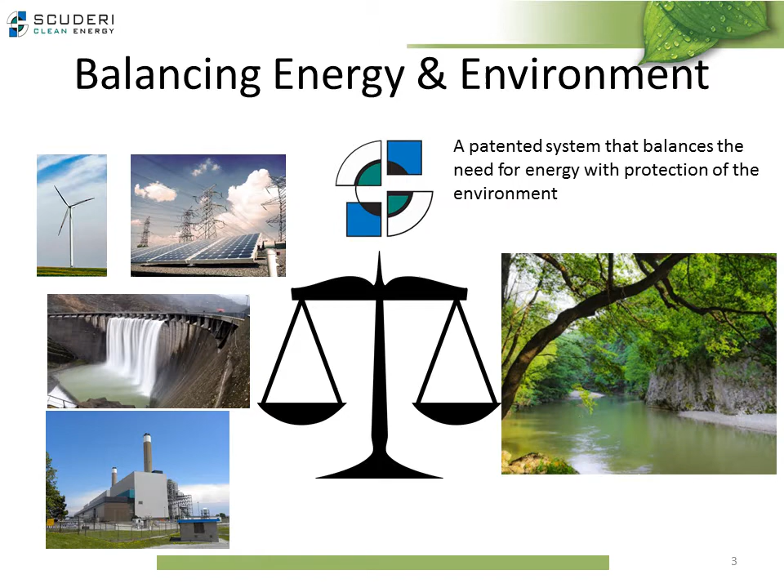Scuderi Clean Energy has developed several products for the distributed power generation market. The distributed generation market is made up of a variety of small, grid-connected devices that produce power on a more local level. These systems are referred to as distributed energy resources, and they make up the fastest growing segment of the power industry. Scuderi Clean Energy products are specifically designed for clean, efficient power generation and energy storage. In addition, our technology is protected with over 300 patents in over 40 countries.

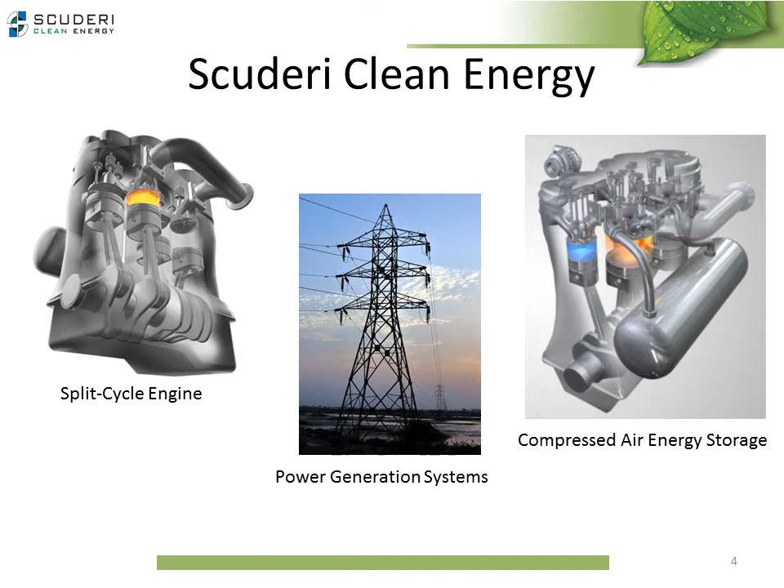For the power generation projects, Scuderi Clean Energy will utilize conventional engine technology that has many decades of proven performance from such companies as General Electric and Caterpillar. This effectively eliminates any technology risk for the main power generation component of the project.

In the power industry, there are two types of power systems that utilize natural gas to produce electricity. One is a combined heat and power unit that produces both electricity and heat to be sold to an end user. The other is an independent power producer that produces electricity to be sold into the grid. The interesting thing is that even though both technologies utilize natural gas as the primary fuel and utilize engines with generators to produce electricity, the two systems never seem to cross.

Combined heat and power systems are typically much smaller than independent power producers. They are designed around the heat requirements for a specific end user or customer, with the electricity as only a secondary benefit. The overall efficiency of CHP units is normally high because it uses a large percentage of the total energy produced, that is, both the heat and electricity. However, CHP systems are more focused on the use of the heat and are not typically designed to have high electrical efficiencies. High electrical efficiency is a key requirement for being able to profitably sell electricity to the grid.

IPPs, on the other hand, are typically much larger systems that are specifically designed for high electrical efficiency. This enables them to compete effectively when selling electricity into the grid. However, the IPPs never utilize the heat from the systems.

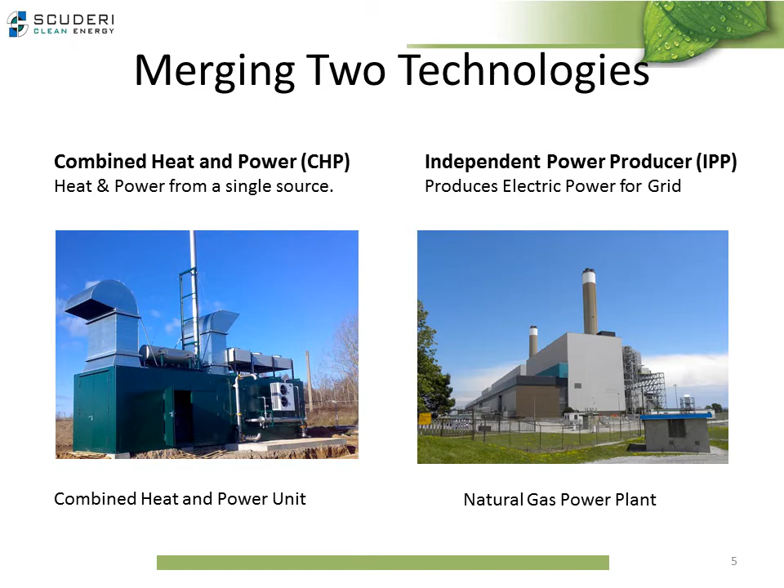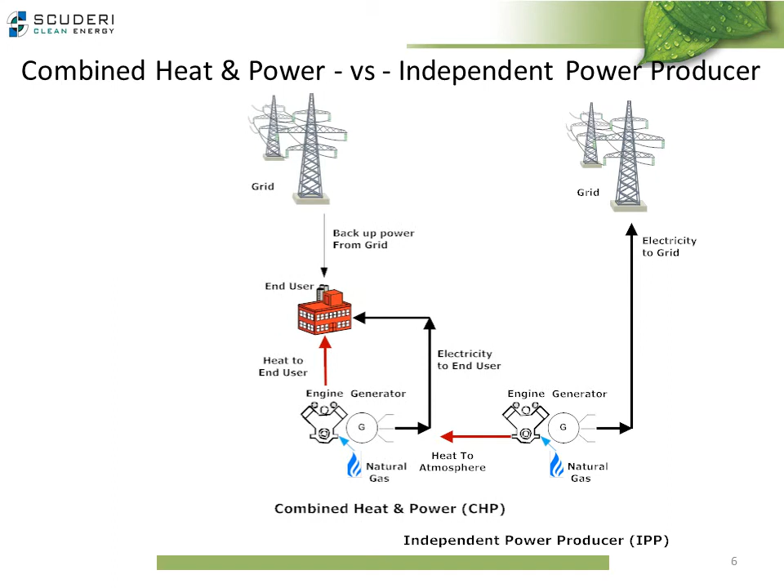Scuderi Clean Energy recognized a niche in the distributed power market located between the combined heat and power systems and the independent power producers. By merging these two technologies, the Scuderi system can function as both a combined heat and power unit and as an independent power producer. Scuderi systems are typically larger than most combined heat and power units and smaller than most independent power producers. In addition, Scuderi Clean Energy systems are designed for both high electrical efficiency and for utilizing the heat from the system.

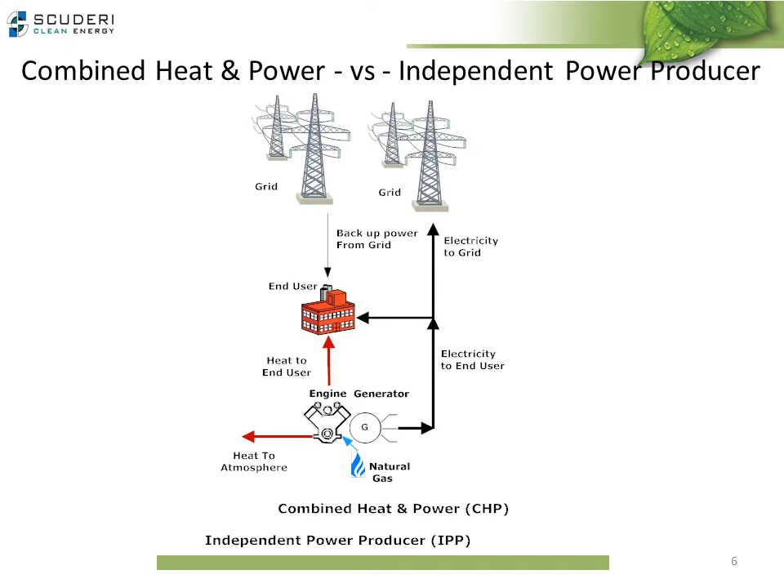By merging these two technologies, Scuderi Clean Energy has created a patented distributed power generation system that is a hybrid between a combined heat and power system and an independent power producer. This hybrid concept benefits from the advantages of both systems while eliminating some of their negative features.

One of the most significant advantages is being able to generate multiple revenue streams from both sides of the technology. For example, combined heat and power systems have 4 different revenue sources. First, electricity sales to the end user. Then the sale of heat or a commodity produced from the heat. Then alternative energy credits, which are state incentives for clean energy. And then accelerated depreciation, which is a federal incentive for clean energy.

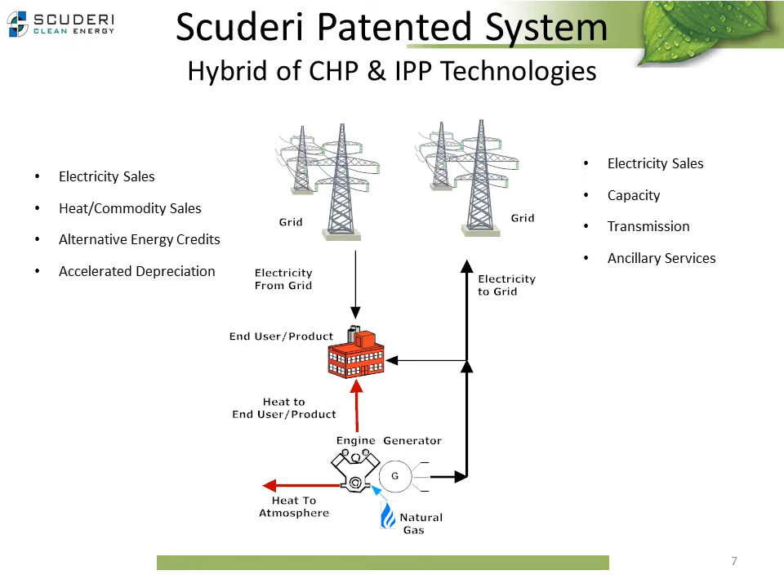The independent power producers also have 4 potential revenue sources. First, electricity sales to the grid. Then capacity payments, which also come from the grid. In addition, there's the opportunity for transmission payments, and finally, ancillary services. Achieving all of these revenue sources is only possible with the Scuderi Clean Energy patented design.

Utilizing the heat from the system is critical to its overall performance. By using the heat to produce a commodity or product, additional revenue is generated, and the units also qualify for both federal and state incentives, such as accelerated depreciation and energy credits.

There are numerous commodities that require heat in order to be produced, such as distilled and deionized water, urea, ammonia, ethanol, and many others. The advantage of commodities is that they can be sold on exchanges or in bulk, and the revenue from these commodities could be the biggest income stream of the entire project. For example, some of the markets for distilled water are cannabis growers, plating companies, printers, labs, and many others.

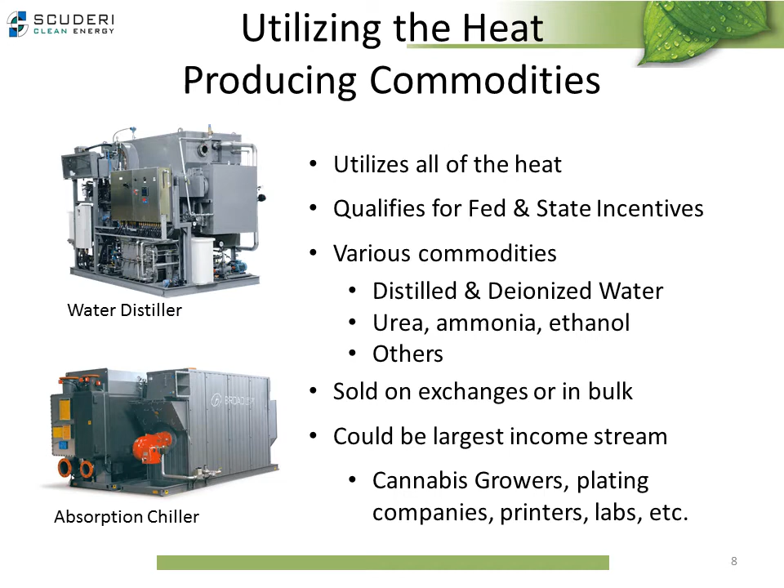The importance of multiple revenue streams is both intuitive and exciting. First, they act as a built-in hedge against market fluctuations. In addition, multiple revenue sources can have a significant impact on the bottom line of a project. For example, Scuderi projects typically have EBITDAs or net cash flows of over 50%.

This is very unusual in the power generation industry, which typically operates on very low margins. Also, multiple revenue streams help to ensure the financial stability of a project, and they help to reduce the dependency on any one revenue source. All of these benefits help make these projects very attractive to potential investors.

In addition to the multiple revenue sources, Scuderi Clean Energy projects represent a socially responsible investment. Because of their unique design, they have a significant impact on helping to reduce CO2 emissions. With only one project, over 6,400 tons of CO2 are prevented from entering the atmosphere every year. That is equivalent to removing over 1,200 cars from the road annually.

Also, because of their highly efficient design, these projects help reduce the cost of electricity, which is good for everyone. And since these are distributed power generation sources, they help strengthen the reliability of the grid. This includes both natural and man-made disasters such as cyber attacks and hurricanes like Superstorm Sandy. Also, because these projects produce clean energy with overall efficiencies above 80%, they meet the qualifications for both federal and state incentives. And because they are distributed power facilities, they help create local jobs.